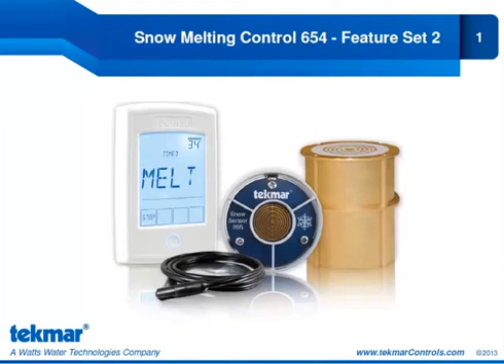This segment is going to focus on some features that are particular to the Snowmelt Control 654. If you did watch segment 5, you already went through some features that are particular to the sequence of operation of the 654. In this segment, segment 6, we're going to look at feature set 2, which are a set of features that relate to the performance of your snowmelt system.

The outline for this segment is to begin with the Tandem snow ice detection. Now that is a feature that we did mention when we looked at the applications because it was featured in application 2. We're going to go through it in a little more detail in this block and in a lot more detail in the technical block, which is our final block 8. We're also going to look at slab outdoor reset and slab protection as features for the 654. We'll look at exercising, alert output, and the new manual override for the Snowmelt Control 654.

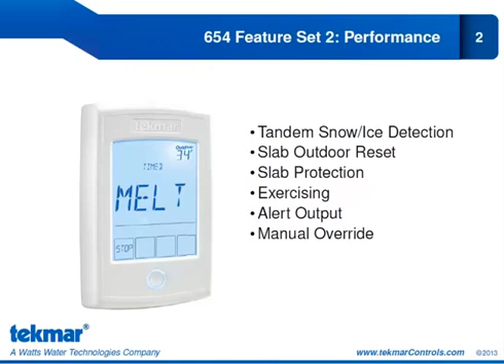Tandem snow ice detection, as we talked about before, is when we have two automatic 090 or 094 snow ice sensors installed in a single zone. So if you look at the image, we have labeled it Snow Zone 1. And in that snow zone, we have two of the 090 or 094 sensors. Now, reasons we might want to do this is if we have an extremely large zone. So often you'll see a very large driveway, and it's difficult to represent the conditions of the entire slab from a single sensor. Now you have the option of installing two sensors in that zone.

We also might want to use this feature if it's a critical snowmelt area and we want to have a backup sensor. So we can be sure if one of those sensors were to fail that we will still be able to melt the slab reliably. We'll still have the automatic start and stop functionality from the second snow ice sensor. Now the way it works is either one of those sensors can detect moisture to initiate a melt cycle. But both of those sensors have to be dry to signal that melt cycle to end.

You can see we have labeled Snow Zone 1 Master. And the master is the 654 control that would be operating the snow melting equipment. So that's going to your boiler or to your mixing device, to whatever it is that this 654 is controlling for the snow melt system. The member 654 doesn't operate any equipment. It is only connected to its snow ice sensor, and then we're using the tekmarNet communication to relay that information to the Snow Zone 1 master. So all of the other relays on the member 654 are not operational with the Tandem snow ice detection.

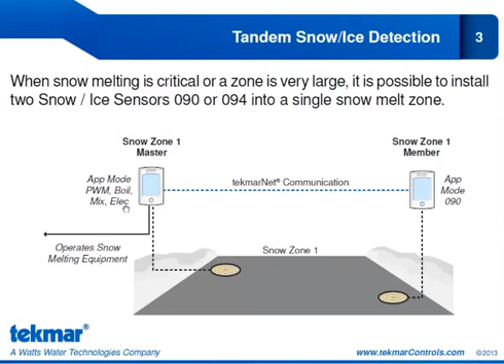So here's another look at the Tandem snow ice detection. We can see both of our 654s, and this is an enlarged view of the 654s. When we're setting up these 654s, both of these controls would be programmed to be Snow Zone 1. Because remember, they are both operating in that first snow zone. As soon as we select the application mode of 090, this 654 automatically becomes the member, and we can see that right in the view menu. It'll say Snow Zone Member 1.

The other 654 can be programmed for an application mode of PWM, boil, mix, or elec, depending on what that 654 is controlling. And when you select this application mode, it automatically becomes the master. And this again shows in the view menu, it will say Snow Zone Master 1.

Now remember, we can connect up to 12 654s together, so we can have up to 12 snowmelt zones when using the 654. Each of those zones can have tandem snow ice detection. So what that means is, in a single snowmelt system, we could have up to 24 of the snow ice sensors 090 or 094 and be doing tandem snow ice detection in each of our 12 zones if we have 12 zones.

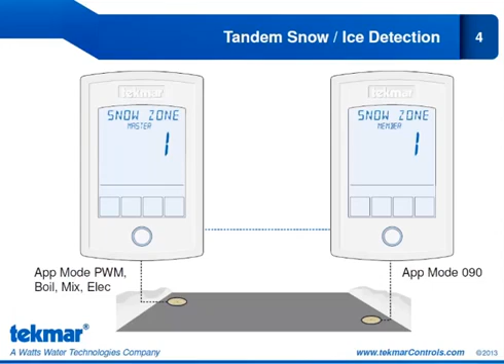Slab Outdoor Reset is a feature that happens automatically as long as we are measuring the slab temperature. So Slab Outdoor Reset allows us to maintain a constant surface temperature by varying the temperature of the core. So we will vary the core temperature as a relation to outdoor temperature. Obviously, the colder the outdoor temperature gets, the higher our slab core temperature must be to maintain that stable surface temperature.

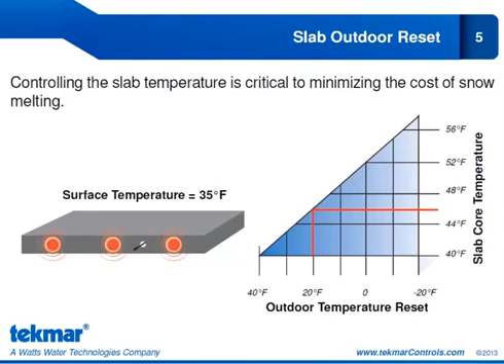At 20 degrees Fahrenheit, we have a slab core temperature around 46 degrees Fahrenheit. If we decrease our outdoor temperature to 0 degrees, our slab core temperature has to raise to 52 degrees to maintain a surface temperature of 35 degrees Fahrenheit. So Slab Outdoor Reset is something that's automatically done by the 654. We do that to control the heat delivery to the slab and minimize losses.

Another feature that we have in the 654 is Slab Protection. So we want to avoid sending high temperature water to a cold slab, because what that creates are tensile stresses in the slab, and tensile stresses result in cracking. So you can see here, if I'm sending very hot water to the slab and it's encountering the cold temperatures of the slab, it's creating tensile stresses, and you can see this cracking that happens as a result.

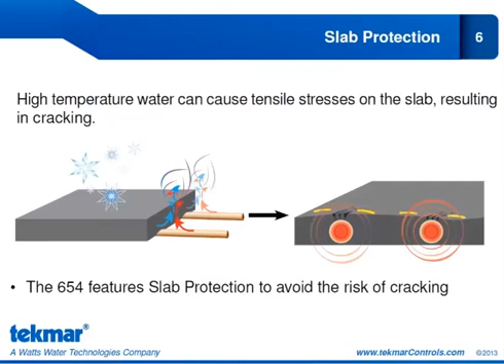To make sure that doesn't happen, the 654 features Slab Protection. Now this is a feature you can turn on or off. If you turn it on, then we're going to make sure that temperature differential is minimized so that there is no tensile stress on the slab. There is no thermal shock to the slab, so we avoid the risk of cracking.

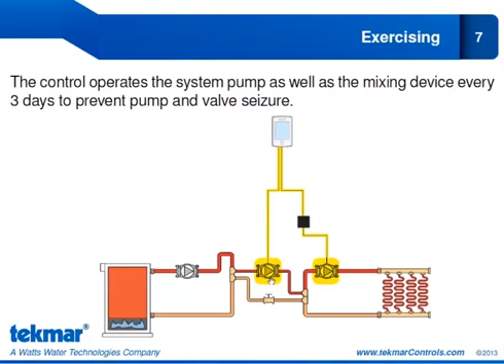If your 654 is operating a hydronic snowmelt system, then we will automatically operate the mixing device and the system pump every 3 days to prevent any type of seizure. So automatically every 3 days, your system pump and your mixing device, it could be a pump or a valve, is going to be operated to prevent seizure.

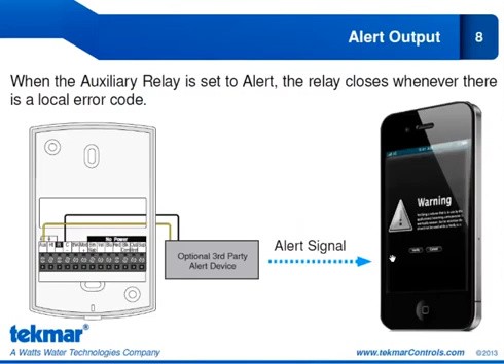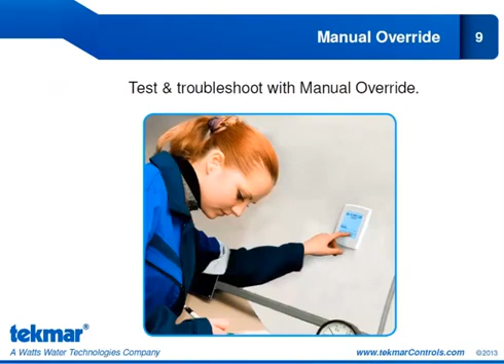Those of you who are familiar with the Boiler Control 284 are familiar to some degree with manual override. Now, manual override is something that we have included in the Snowmelt Control 654 as well, so that you can test and troubleshoot the snowmelt control. So many times we get calls at the start of the season and people want to make sure the snowmelt system is working. And in the past, we have had to fool the system into thinking it was cold enough to operate. Well, now we can use manual override and operate equipment as we need to.

So there are 6 manual override modes. We have the auto mode, and that just operates the system as normal. We have a purge mode for hydronic systems to purge the system of air. We have the max mode for hydronic systems as well. And what the max mode does is operate the boiler supply or the mix supply, depending on what your system is, to 130 degrees Fahrenheit.

We have the test mode, which would be for electric systems, and that operates the electric equipment for 10 minutes. The hand mode will allow you to operate individual pieces of equipment separately. And then we can use the manual override of off to turn our snowmelt system off without actually cutting the power. So these manual override modes are a real benefit to the new Snowmelt Control 654 so that we can do the testing that we need to without having to trick the system, so to speak.

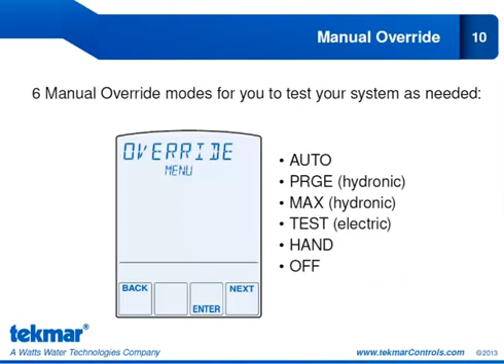In summary, in this feature block, we talked about slab outdoor reset and slab protection. We looked at the tandem snow ice detection. We talked about exercising and using the auxiliary relay for an alert output. And of course, we talked about the new manual override menu and how it can be used to test our system as needed.

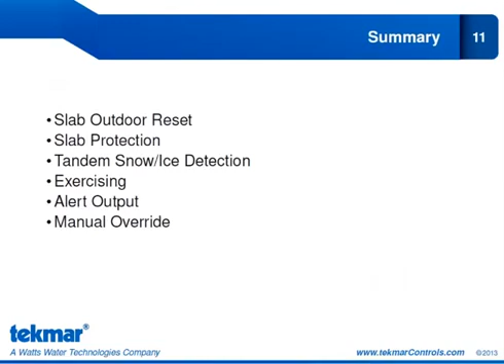Now there is one more feature set block left to cover, and that feature set will talk about the tekmarNet communication features. So stay tuned for that, and we'll talk to you again soon.